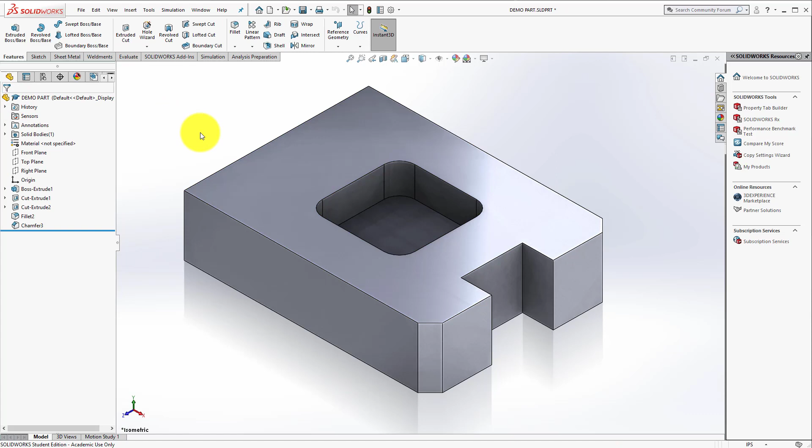If I didn't select that surface and I went in and hit Hole Wizard, later on we're going to have these tabs for positions, and it's going to ask me to select the face for that part. Then I can apply holes on that, as you can see. So whichever way you like to do it, whatever your preference, both work just fine. I'm going to hit the surface and hit Hole Wizard.

Inside here we've already talked about the two tabs for type and position. Let's stay with type. There are several pictorials here of different types of holes, and when you hover over them, it'll tell you, like, that's a counterbore. That might be if we want the head of a bolt to be recessed inside a part, or if we want to do a countersink, or if we're just going to do a simple drill through hole.

What I'd like to do is a tapped hole, and that's going to be a straight tap. So we're going to click on that and do ANSI Inch. This tells us what kind of hole we're going to do - we're doing a tapped hole using a bottoming tap, so that hole won't go all the way through and will be a blind hole. Maybe we want to bottom tap it. I'm going to do a tapped hole on this. I can pick - again, it changed to metric because I accidentally hit my scroll wheel earlier.

So I'm going to go through and do a tapped hole. I'm going to say I'd like to see some quarter-20 tapped holes on here. Quarter-20 is a quarter-inch nominal diameter with 20 threads per inch - that's a UNC thread.

I can go through all, or do blind, or up to some point. Typically we either see a blind hole - where the hole doesn't go all the way through - or I could say through all. So I'm going to say through all on this scenario and have the hole go all the way through. Then I'm going to look at some of the other options we have.

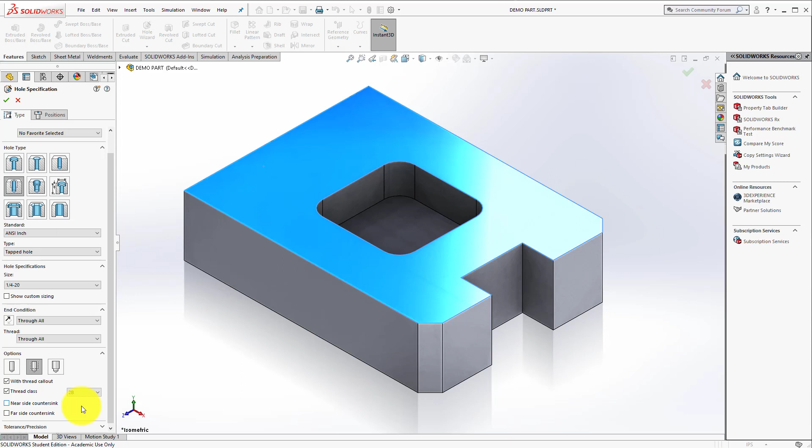We have 'with thread callout.' I'm going to turn on the cosmetic thread here - always have cosmetic thread on with thread callout. That's going to allow us, when we import it into a drawing, to have the thread callout. I can also choose what class of thread I want. 2B, remember, is a general thread. So if you're at a company and they want the class of threads to show on their drawing designations, activate that from right there. Now what I want to do next is apply this to this surface and drill and tap those holes.

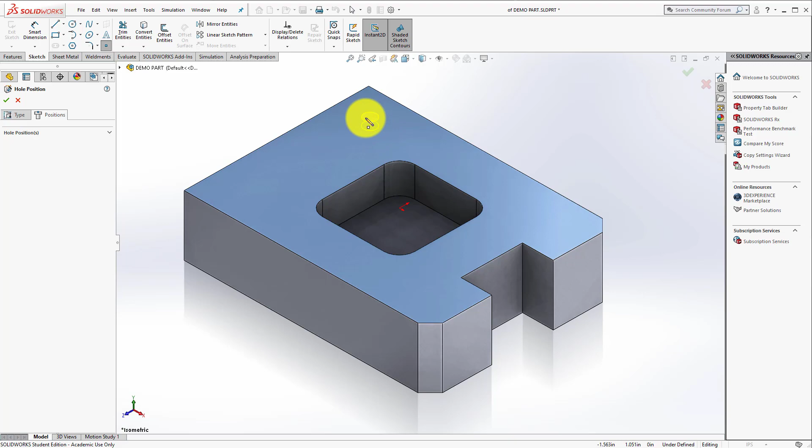I'm going to go to position, and I don't like the fact that I'm in an isometric view, so I can hit spacebar. Let's go ahead and hit this first. I'm just going to put this first one in place and hit escape, then go to normal view so I can see normal to the surface.

Anytime I put a hole on there and hit escape, I could have kept putting multiple holes in as I went through position. A hole is indicated by the use of a point. So if I use the point right here and start applying holes, I can apply multiple holes in that part, just wherever I put a point. Now again, I would probably want to hit escape there.

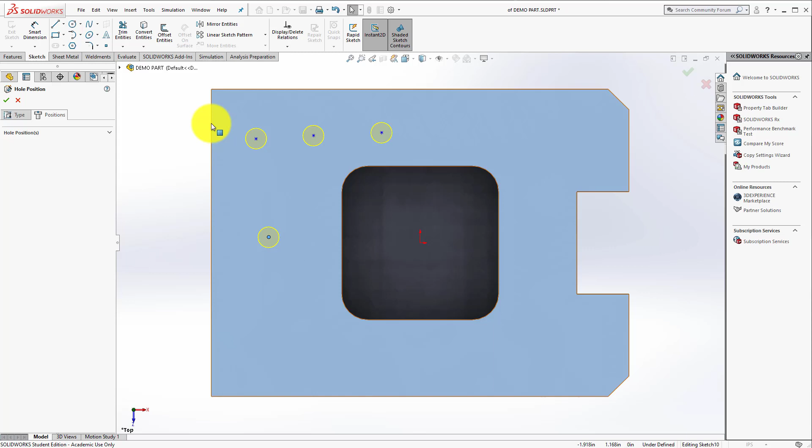If I wanted to put a hole in there, I'd probably need to get an X and Y location as to where that hole is going to be. You can come in here and delete these holes as well. We're going to put one hole in there and use a linear pattern to put in several other holes. So I may want a hole here, a hole over here, and one here. And I can now have a pattern, and we're going to talk about how to pattern those holes.

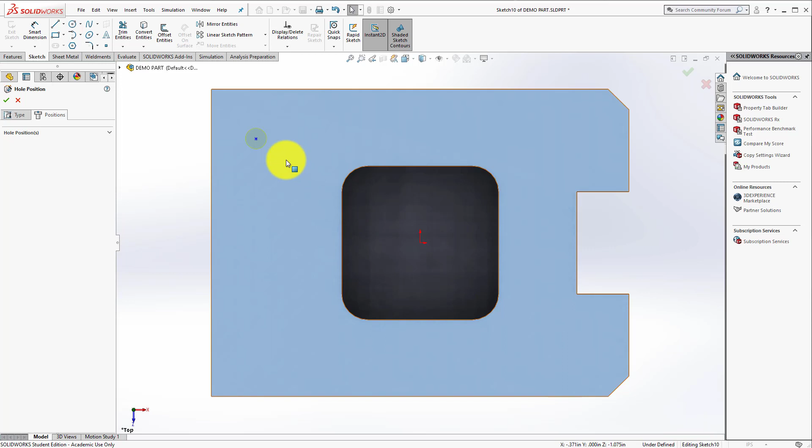Once we've got this one hole drilled, we're going to give it an XY location because we're going to need that. I'm going to say that's 1/2 inch from there. And again, I can set the tolerances and everything I would want to capture my design intent. Here I have this, and I'm probably going to go 0.5 there as well.

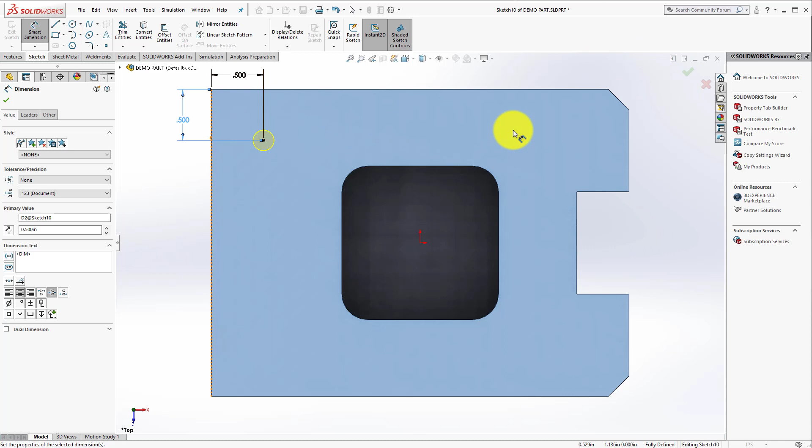Now that's one hole that is in this part, and we're going to put some other holes in it down the road using a linear pattern.

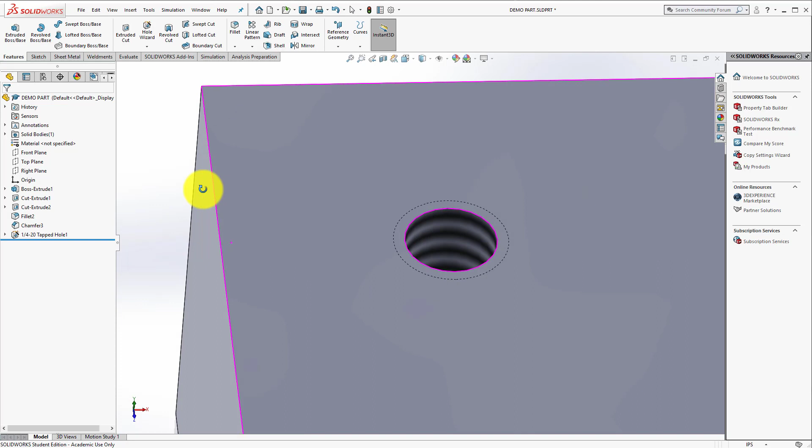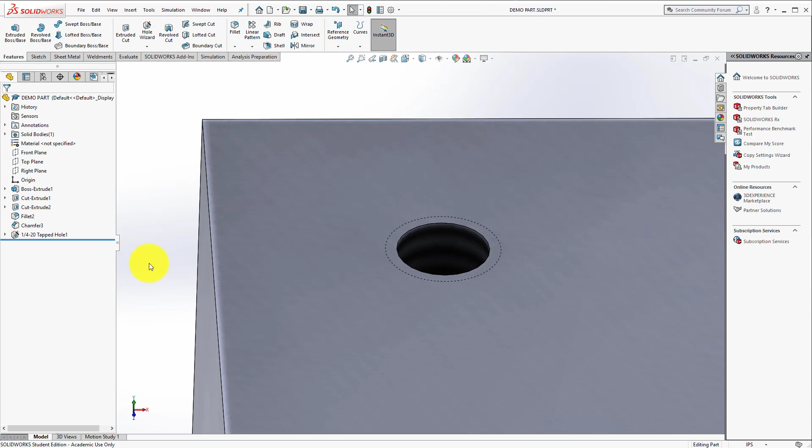Now when I look at this, it's going to have the simplified type version where it has a hidden line on there, as well as if I zoom in here and get my monitor where it's got the right images on there because of the lights, you can see that it looks like there's an actual cut thread in there. That is actually a JPEG feature inside there that is a scaled representation. That is a cosmetic thread, and that's when we told you guys to set up our options, and we went to the document properties, and that's where we saved the detailing here as cosmetic threads and shaded threads. So that was what we saved in our template, and that's how we can see that. We don't want to put a true helical cut in there because that's going to take a lot of processing time.

Now once we have one hole in there, we may want a repeated feature where there's a hole here, here, and here, and maybe even another hole right here, but not one here. So we're going to come in and learn how to use a linear pattern to replicate the hole wizard hole that we did. And so this is also another new feature within the command manager for features.

We're going to use a linear pattern. And we're going to click on linear pattern, and it's going to say direction 1. This is going to be direction 1. That might be like our x-axis. It's going to give us a dimension, how many instances we want to have.

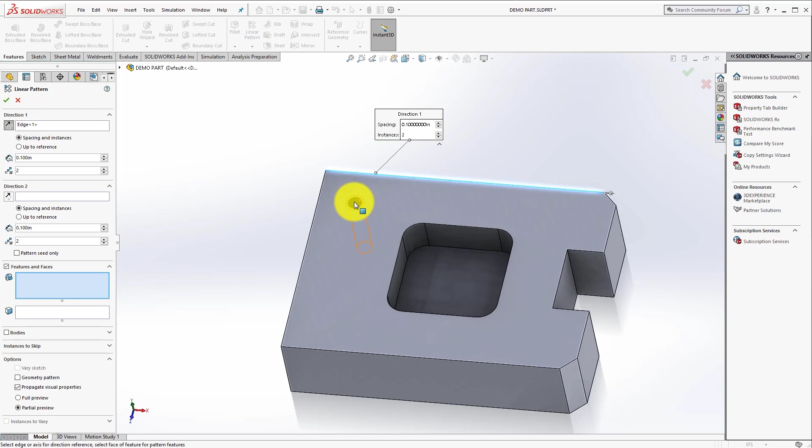But we probably need to come down here to features, and we're going to pick that hole, or you can expand your feature tree here, and I can say I want to do that hole. Now you notice there's two holes side by side. I can increase the size here and bring it on out and say I would like a hole maybe at 2.5 inches from this hole in this direction.

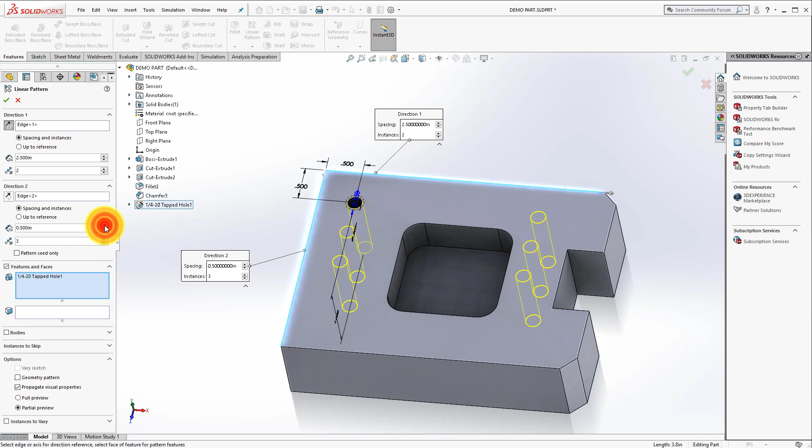I would like to see some other holes in the other direction. So I'm going to come in here and say in this direction, using this line here as a directional guide, I'm going to put 3 holes in here, and I'm going to stretch those out to 1 inch gap distances. So now I have 6 holes that would be drilled in here into this part, but I really don't want this hole right here to be drilled for some reason.

One nice thing that we have is we have an instances to skip portion of this menu right here. And when you click on that, it's going to have a little blue dialog box that's basically wanting you to pick these nice little pink dots. If I pick that one, it now pops it over to here that was on the matrix grid, which one it was, 2 and 2, and it's going to put it here. And if I delete that, it's going to draw it back over there. So I can actually tell it not to show, but to skip that one instance.

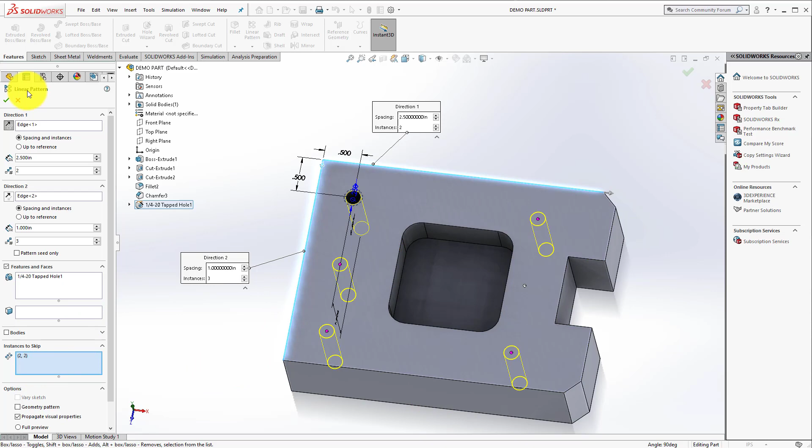So now I've repetitively created a linear pattern for repeating holes on there. Again, the key is to build your feature tree as you're doing these things. So you could have put all the locations of the holes in there, or you could use a linear pattern like I did. And if you notice, it has the dimensions for that linear pattern as well.

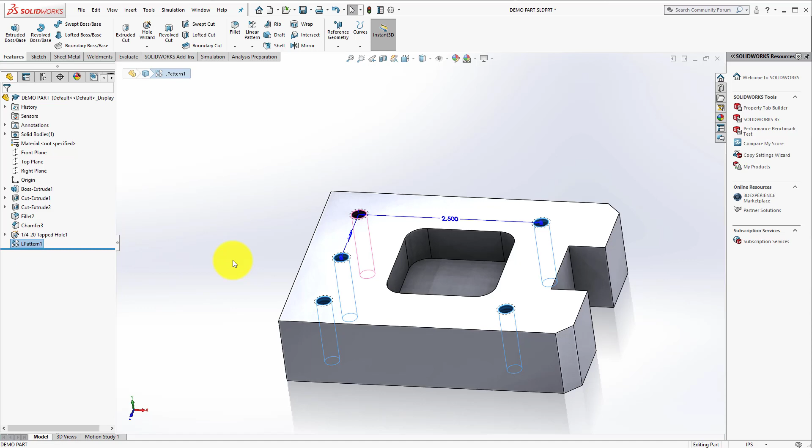So at this point, we have now shown you how to use the hole wizard and how to use a linear pattern.